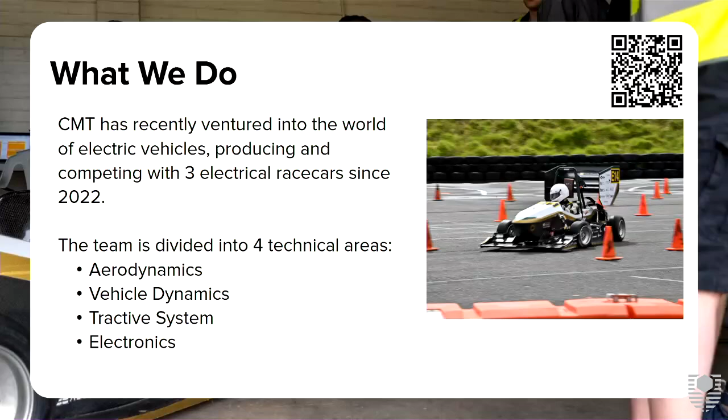This is our mission statement. Basically we're trying to advance each one of our engineering knowledge and professionalism. So we try and apply the stuff that we learn here in the classrooms to basically a real world technical problem. As well as that, we also focus on the professionalism and soft skills that we develop in the workforce.

So our management, leadership and communication skills. Along with the technical sub-areas, we also have about 6 business sub-areas, and we basically self-manage our own team as well. So there's a really good chance to get into the project management side as well.

And also, what will be really interesting for you guys, we're becoming autonomous. So we're looking to move into the autonomous space. There's currently 3, what I would say, working autonomous vehicles in the competition, and that's rapidly increasing.

Last year, Monash University did their first full run around a track, and just 2 years prior, they basically couldn't even get it moving. So it's rapidly increasing in the improvement space. We're also looking to join that as well.

So we've had several thesis students starting off the designs, and now we're looking to build our own autonomous sub-team as well, which hopefully as some of you guys join up this year, you'll be able to get involved in as well.

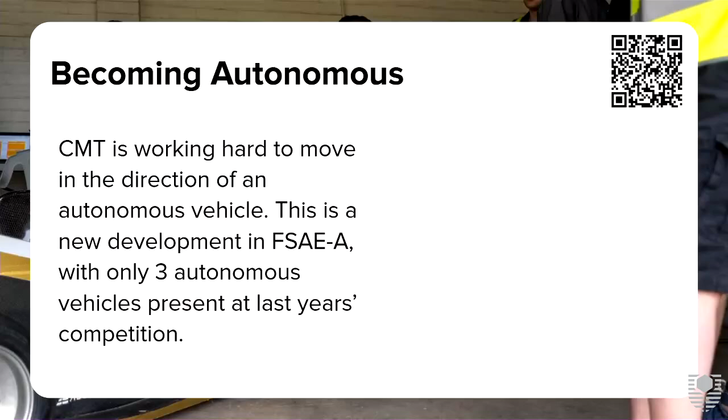As I said, my name is Brendan. I've been on the team for 4 years now. I'm doing my final semester this year, so I might not get to see a whole lot of you guys, but this year I'm doing my thesis on the design and testing of the custom accumulator or battery segments.

So we build our own battery pack as well. I'm in charge of basically the cell selection and also all the auxiliary stuff to do with that, so the cell connections, cell fusing, component selection, stuff like that, and also the cooling and packaging of it all.

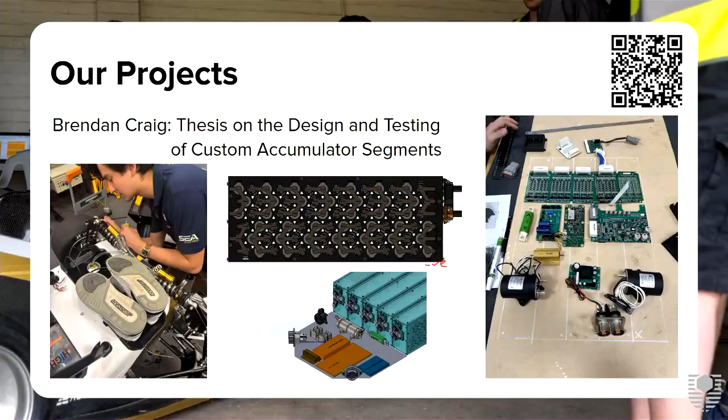So why become a member? Along with getting the opportunity to develop as your own engineer, you get to apply the concepts you've learned in class and work on real life projects. It's also a great way to gain experience and outreach. You get professional development through the team, and you also get to work with a lot of professional companies currently working both in Australia, Perth, and in the global scene.

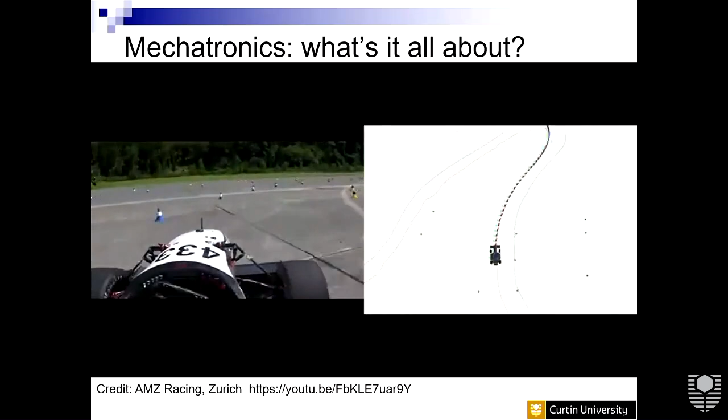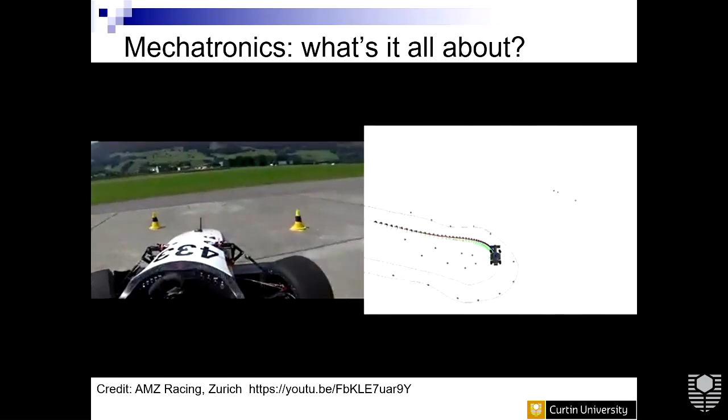Okay, this first video is an autonomous racing car. This video is from AMZ Racing in Zurich, in the autonomous category of the students' electric autonomous racing competition. What we saw here is actually the characteristics or features of a mechatronic system. We saw a mechanical system, the car, interacting with some environment - there are external influences like the condition of the road, and some obstacles on the road, including those cones with different colors.

If it was an autonomous vehicle on any normal urban road, we'd have other influences, like pedestrians and other road users, interacting with the vehicle. So the vehicle is actually perceiving its environment using some sensors.

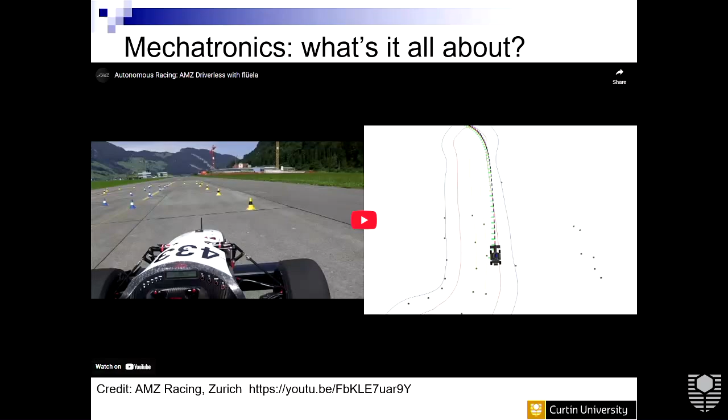Let's see the second one. Forgot my tools again.

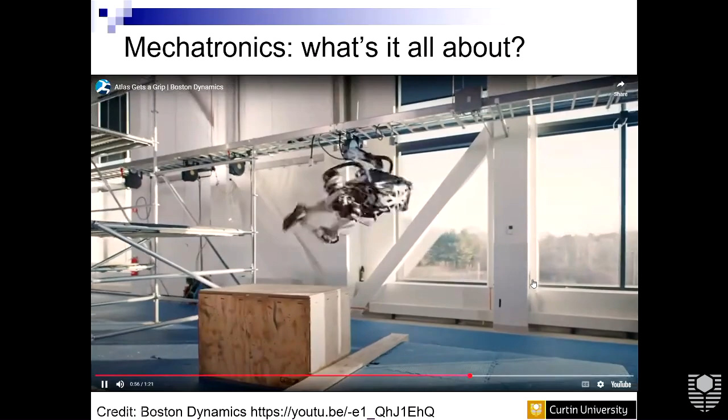Okay, so this one was from a company called Boston Dynamics, and it's an example of an anthropomorphic robot, which is a robot in the shape of a human being with arms and with legs, and designed to perform some manipulation tasks. And you can see similar characteristics with the autonomous vehicle, but with a different sort of mode.

So again, we have a mechanical system interacting within an environment, but this time the environment was a kind of construction environment. And it's able to perform actions within that environment. So it's able to perceive that environment, so it knows where objects are, and it's able to actually make decisions within that environment in order to accomplish some tasks and outcomes. Okay, very similar, right? The characteristics are very similar, but might be in different modes.

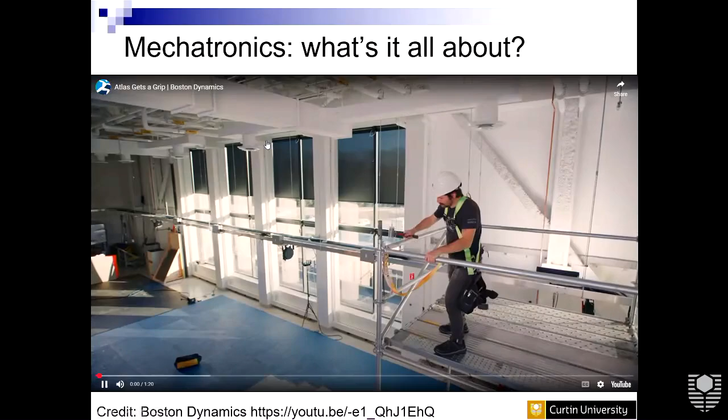And the last one, just watch a bit of this.

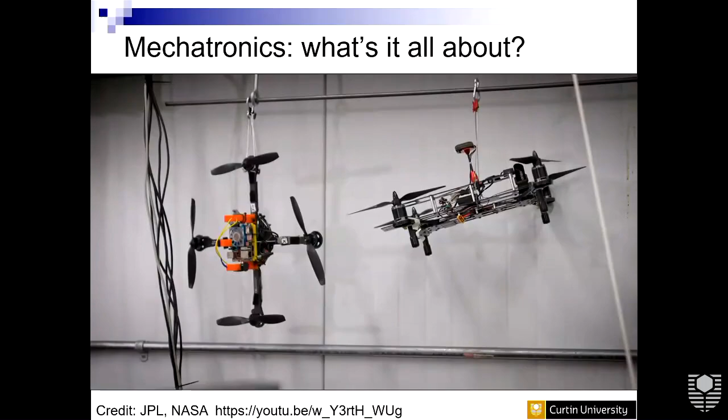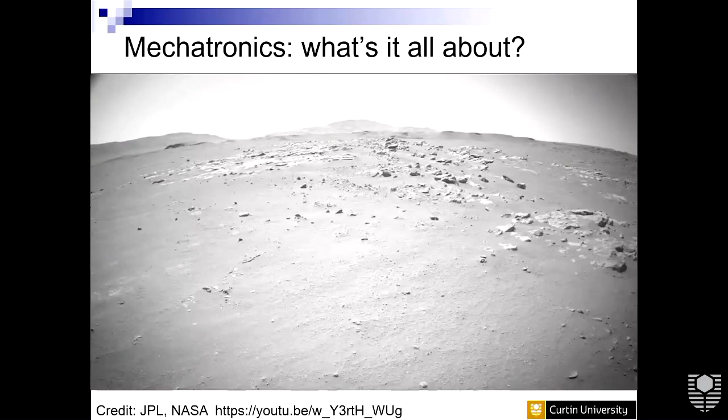The Ingenuity Mars helicopter was designed to push the limits, and I'm going to show you how we've taken it to the extreme. Today, we're here in the Aerial Vehicles Lab at NASA's Jet Propulsion Laboratory, where we develop prototype helicopters. Ingenuity started off as a tech demo to push the aeronautical boundaries over the course of 5 flights. Then we transitioned into an operational demo phase where we partnered with the Perseverance rover to do science and scouting. But about a year ago, when the Perseverance rover started racing up the Jezero Crater Delta, we actually found that we had to work pretty hard to stay ahead of the rover. We decided it was time to shift gears again, once again pushing the boundaries of Martian flight.

This campaign really began in earnest with Flight 49, where we simultaneously set new speed and altitude records. By Flight 62, we had nearly doubled our max speed and doubled our max altitude. We also tested different landing speeds, faster to save energy and slower to reduce landing loads. Both of these strategies may be used on future helicopters. We performed a type of flight testing called system identification. This is a crucial but risky procedure that helps us understand the vehicle's performance by how it responds. Our team also devised new ways to target the high-resolution camera, which allows us to provide advanced reconnaissance imaging for the rover. And we were able to take stunning shots like this one of Belva Crater from Flight 51.

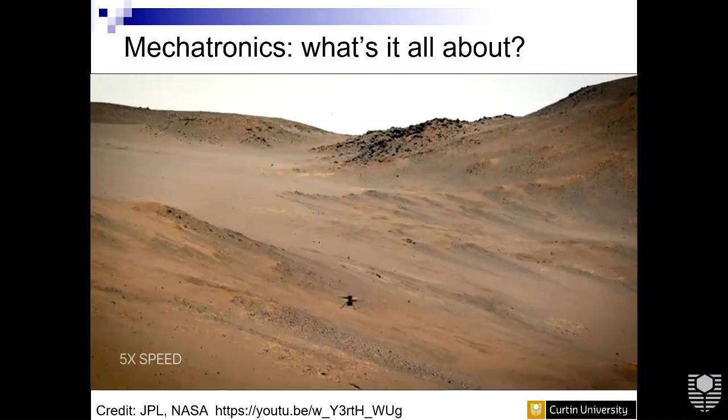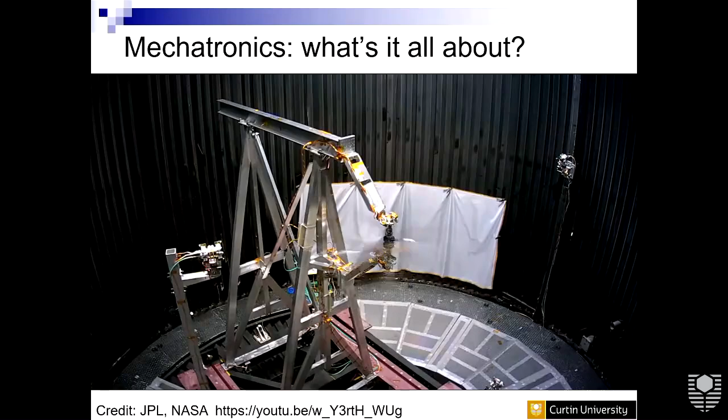In addition, Ingenuity conducted several first-of-their-kind experiments on Martian wind and dust movement, which gave us new insight into the Martian atmosphere. What we've learned will help us design the next generation of Martian rotorcraft. We're testing more efficient blades. We're also working on a Mars science helicopter concept that could potentially transport heavier payloads and take us to more exciting locations on Mars. When people look back at Ingenuity, I really hope that they see how much this one small helicopter has done to elevate the limits of human achievement.

So again, here we see similar characteristics. A mechanical system operating within an environment, perceiving that environment, and performing actions on that environment. Obviously, when you are running a mission on Mars, you may consider other environmental conditions, and your final project is a bit related to this one. It's very interesting. We will have a guest lecturer, I think week 4, on a very interesting topic. Okay.

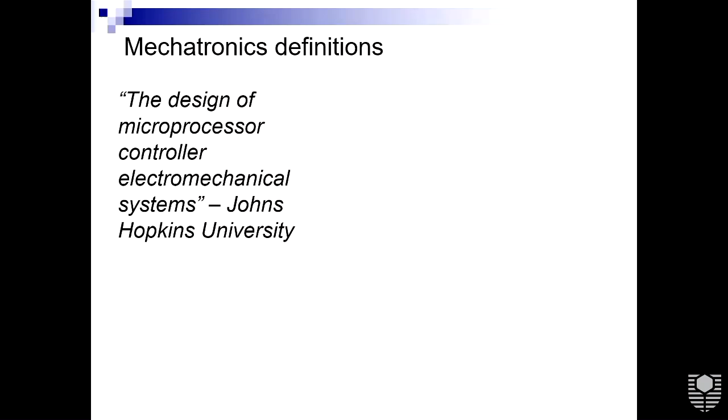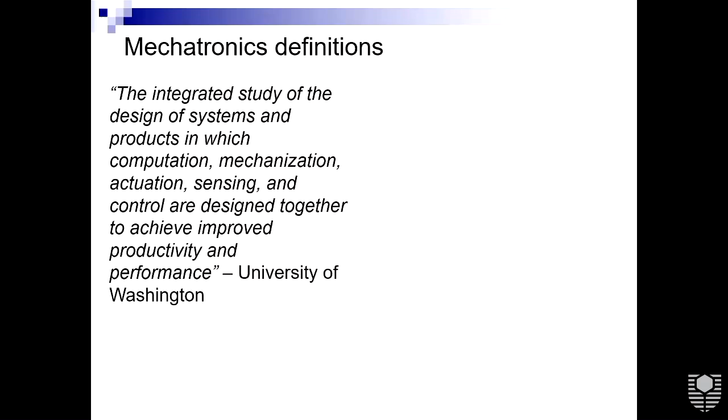Okay, some definitions for mechatronics, some old ones like the design of microprocessor-controlled electromechanical systems. This is from Johns Hopkins University. Another one, the integrated study of the design of systems and products in which computation, mechanization, actuation, sensing, and control are designed together to achieve improved productivity and performance. Or this is another one from UNESCO, the synergistic integration of mechanical engineering with electronics and intelligent computer control in the design and manufacture of products and processes.

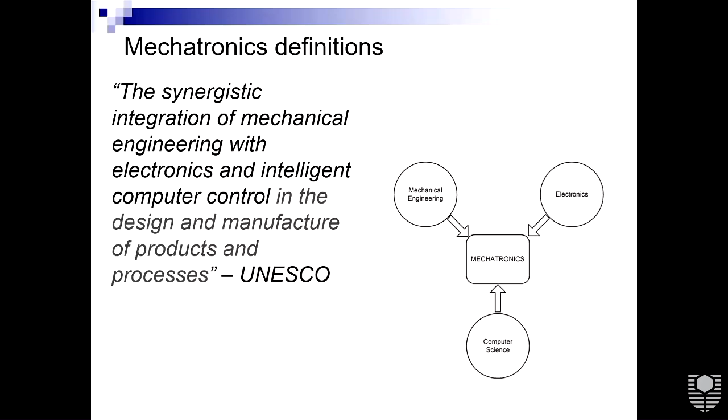Mechatronics, relative to other disciplines in engineering, is newer. It's actually during the last 5 to maybe 10 years that it's really become popular. And I think that's because of the development of autonomous systems across all aspects of industry, engineering, and really life in general.

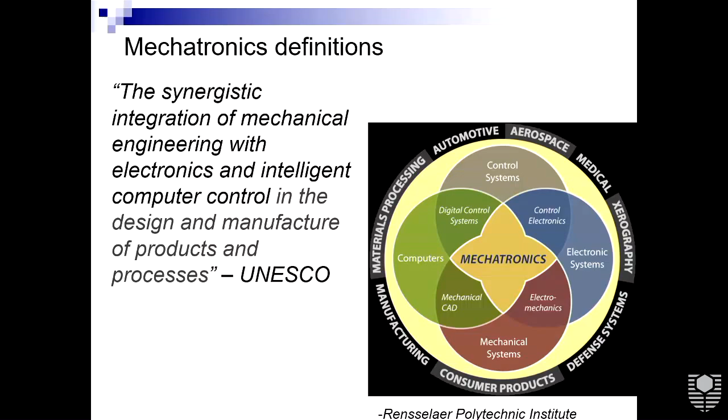So what skills does a mechatronic engineer need? Any idea? I guess skills in all those things that you pointed out. Yeah, yes. Like computer programming, this is essential, right? Embedded systems programming, so it's programming a microcontroller which is interacting with sensors and actuators, and sometimes with some user interface devices to perform some actions in real time, real world applications.

Also, the ability to apply mathematics to real problems. Mathematical modeling actually helps a lot to understand the behavior of the system and predict it. Analyze and design digital and analog systems, mechanical systems. You need to think across disciplinary boundaries, and very important, problem solving.

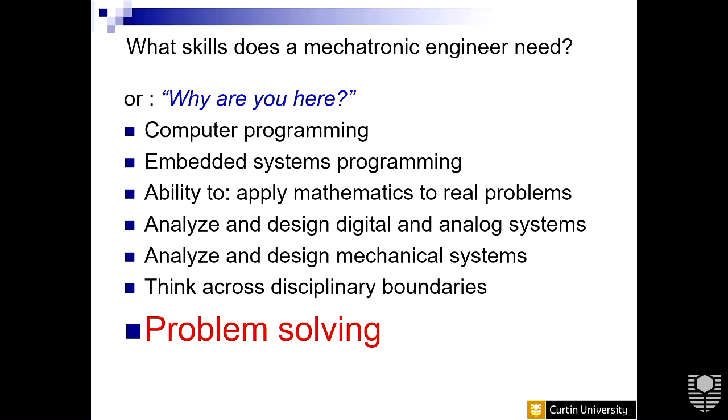How about this unit? This unit is actually a lab-based unit, and as you know, there is a 3-hour lab every week in which you use a microcontroller to communicate with sensors, actuators, and input devices. You need to work effectively in teams and build a mechatronic system based on the microcontroller to achieve the project task.

The labs are very fundamental, and the lectures are really supporting what you do in the lab. The lecture is actually kind of a briefing that gives you the fundamentals to be able to go into the lab and practically implement what you have learned, not just in this unit, but the other units that are related, like the electronics major.

Unit learning outcomes: apply a top-down approach to design a mechatronic solution for an ongoing problem. You need to program a microcontroller using a high-level language to solve an engineering problem, and then design and build analog and digital circuits to interface between a microcontroller and sensors, actuators, and I/O devices.

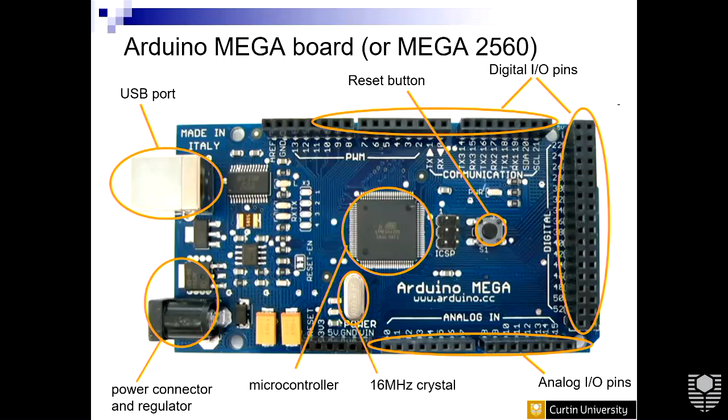So, what is a microcontroller, or micro? It's a single chip computer that can handle input, output, and computation. So it can gather information from sensors, process the input into a set of actions, and send output signals to do something useful. But input also can be received from user interface devices; in this unit, we are using push buttons or joysticks, or wireless communication in some cases to receive data.

They can be used on a wide range of different tasks and applications. There are many manufacturers and models to choose from, and they all behave in a similar kind of way, but the interactions with them might be a bit different. And the one we are using in this unit is ATmega2560.

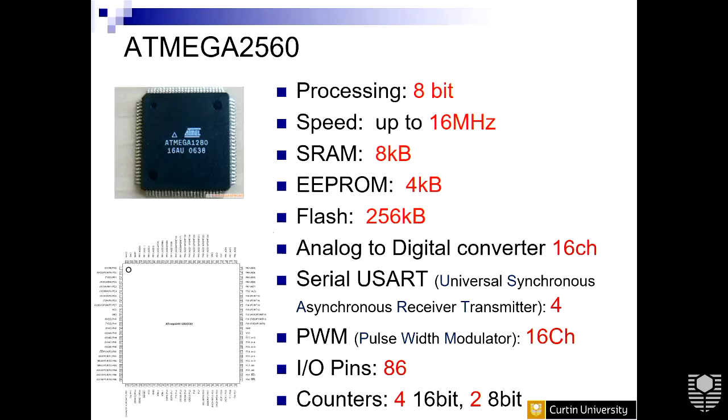Adding, subtracting, and sometimes multiplying can be done quickly, or anything dealing with integers can be done fast, but anything dealing with floating point numbers can be a little slow. So you need to consider these things during your programming. There are different languages we can use, but in this unit we use C.

So, as I said, you need to consider these things. Some operations are fast, like logical operations, bitwise operations, addition or subtraction, and memory access. Integer multiplication with these micros is pretty fast because it has a hardware multiplier, but not all micros have that. And some operations are slow, and some very slow. Anything that is higher order math, very, very slow.

Any questions? Sorry? Okay.

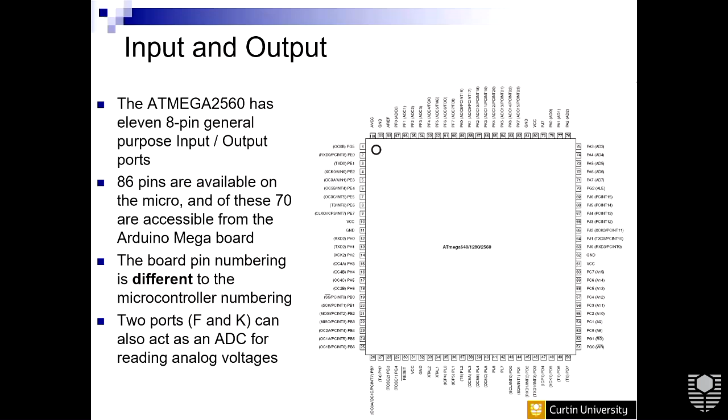You may wish to consider purchasing your own Arduino hardware. It's not compulsory, but I do suggest you have your own Arduino board, so you can use it anytime. In the labs, we use the Arduino Mega 2560, but you can find compatible boards at lower prices. Just go straight to AliExpress and get them for $5. Yep.

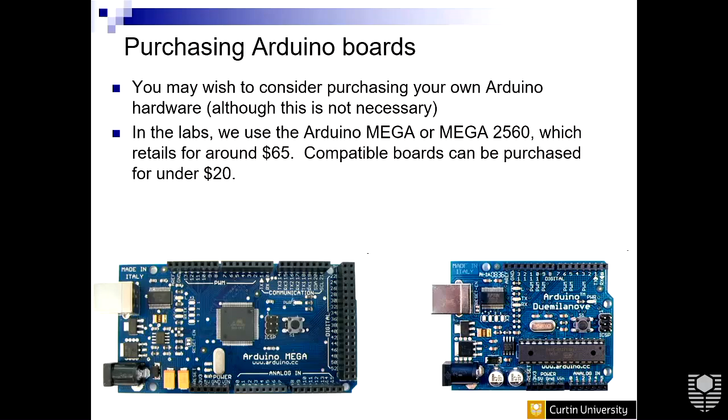Arduino has its own pin numbering system, which is different from the microcontroller port labels. To use the port labels, like port A, port B, etc., you will need to look up the pin associations, either on the Arduino schematic or other references. You can easily search it. Yep.

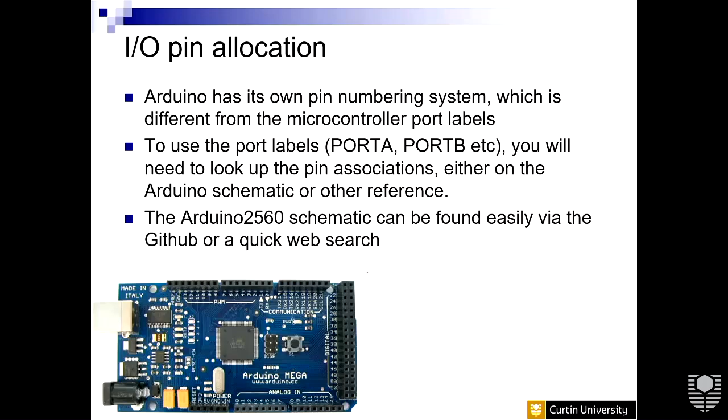Okay, bit of review. Because we will be using a lot of binary in this unit, and I'm sure you all know about these things, just a revision. So you know that computers store numbers in a series of switches, which are either on or off. And the natural way to represent an integer is as a binary expression. This is one example, for number 45 in base 10, or 2D in base 16, hexadecimal format.

So we can use hex representation just as shorthand. In C, a hexadecimal representation is denoted by the prefix 0x, for base 8 it can be just 0, and 0b is for binary representation. Any question on this one? You just need to review this. I know you all know about this. Might be a bit boring, but it's good to review once.

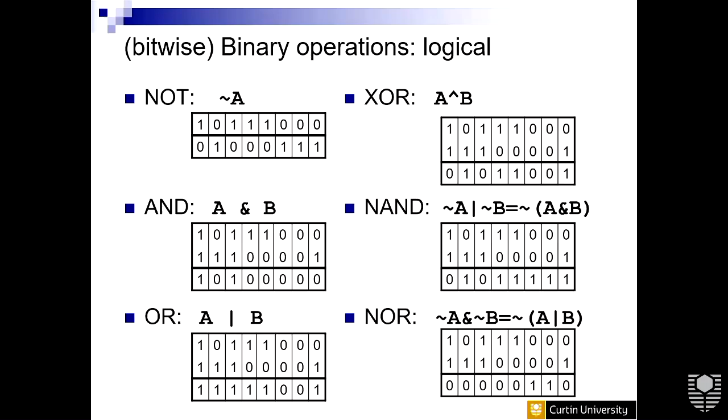And then NAND and NOR, but the first four, NOT, AND, OR and XOR, are the 4 binary operations we use a lot. Any questions so far? Bitwise binary operations, shift left and shift right. This can be useful in your first lab.

So yeah, this is equivalent to multiplication or division by 2, but you need to be careful for overflow.

Registers and digital input-output. Registers are memory locations used for particular hardware purposes. Atmel microcontrollers have registers associated with each I/O port for input, output, and data direction, and most of them are 8-bit registers.

The first one that we have to deal with is the data direction register, DDR, which tells the microcontroller whether each pin is used for input or for output. You will use this one for your first lab. So DDR just decides whether a particular pin or bit in a particular port is being used for reading or for writing. Ones represent outputs and zeros represent inputs.

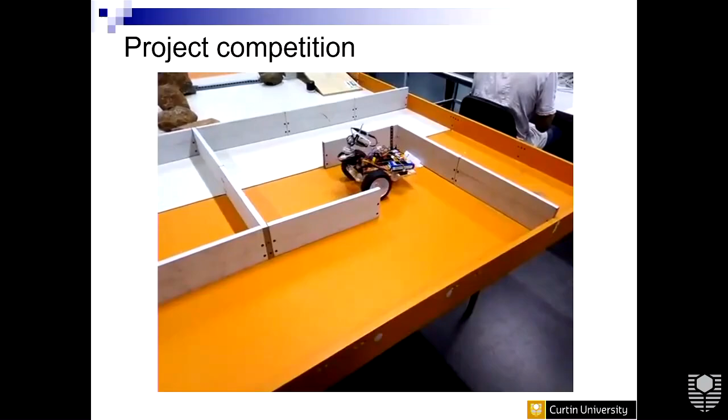Something that's noticeable is that it's much faster driving autonomously than driving manually. We had some symbols and victims. You had to find them. Okay, thank you. Any questions?